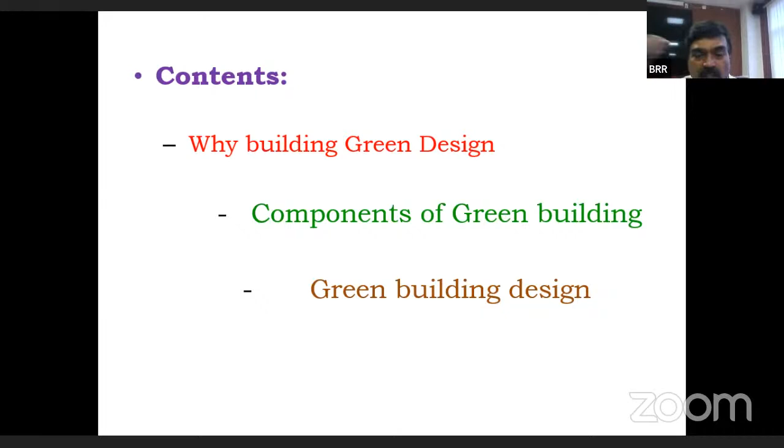So why do we need a green building? Because day by day we are urbanizing, and more than 50% of the buildings, offices, or houses that exist today are yet to be built. Whatever stock we are going to see in 2030, the present stock would be around 40% only. The next 60% is going to be added by 2030.

By 2050, the built-up area of India may be around 4 times the current mass. This is a study made by the Ministry of Urban Development that indicates the demand of buildings as well as the general requirements required for design of the building. This makes us give an agenda or a template for how we should proceed further.

Construction is an essential part of development. We need construction for every infrastructure, buildings, factories, or whatever. Construction increases the economy, increases employability, and is required for economic growth. At the same time, construction is also responsible for consumption of huge energy, and when you consume energy, you emit emissions, including carbon emissions. So construction is, on one side, a growth engine, and on the other side, a very big pollutant.

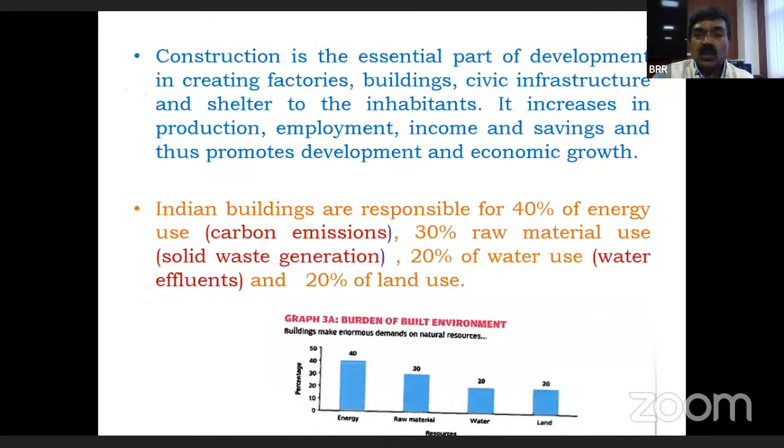The building stock is going to be 4 times or more by 2050.

More urbanization causes the urban heat island effect. This is seen in urban areas where pavements, roofs, everything is either concrete or asphalt or some other material. There is a lot of heat produced, a lot of emissivity between different materials buildings are constructed with, and lack of evapotranspiration because there is no vegetation. Moisture gets evaporated and lost from the atmosphere, increasing the heat, and the whole area becomes like a heat island. This is the concept that huge urbanization leads to urban heat islands in urban areas.

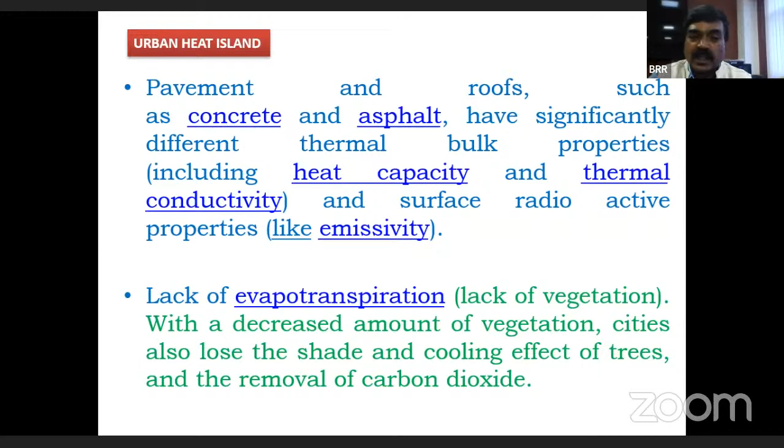Tall buildings provide multiple surfaces for reflection and absorption of sunlight, increasing the efficiency with which urban areas are heated - this is called the urban canyon effect. Buildings block wind, which inhibits cooling by convection and prevents pollutants from dissipating. Waste heat from automobiles, air conditioning, industry, and other sources also adds to the urban heat island.

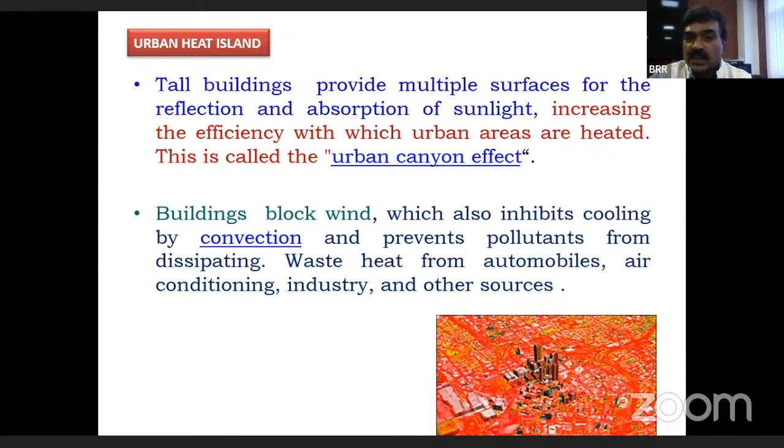High levels of pollution increase UHI as many forms of pollution, majorly due to radioactive properties in the atmosphere, causing a rise in temperature and increase in concentration of ozone. These are a few effects of urban heat island. But we can think of some mitigations - white roofs, green roofs, planting trees, or green parking lots. As civil engineers, we will be concerned with white roofs and green roofs.

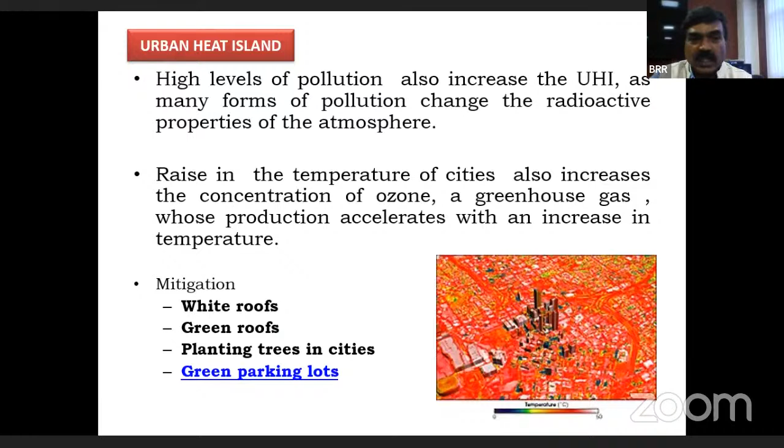When we talk about construction and building activity and building materials, this building construction activity, every stage of activity has got some environmental effect, right from the mining of the material.

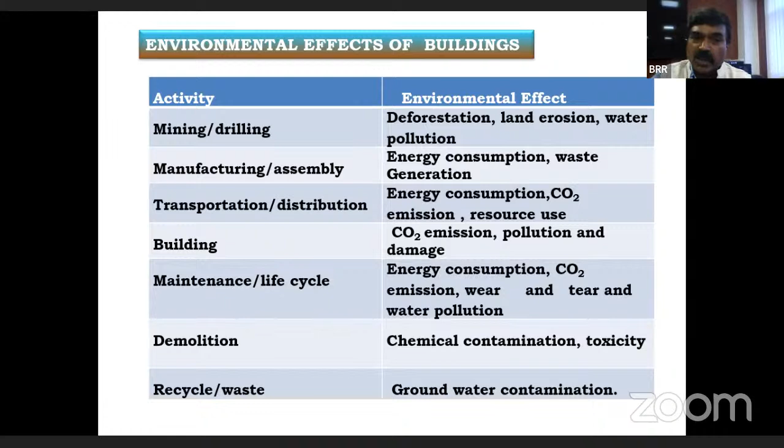Then we think, what is a green building? This green building is the practice of increasing efficiency by which buildings use resources, energy, water, and materials while reducing the building impacts on human health. We use minimum resources and reduce the impacts on human health.

They ensure that the waste is minimized at every stage during construction operation and entire life cycle cost of the building also. Throughout the life cycle, they will ensure that the waste is minimized.

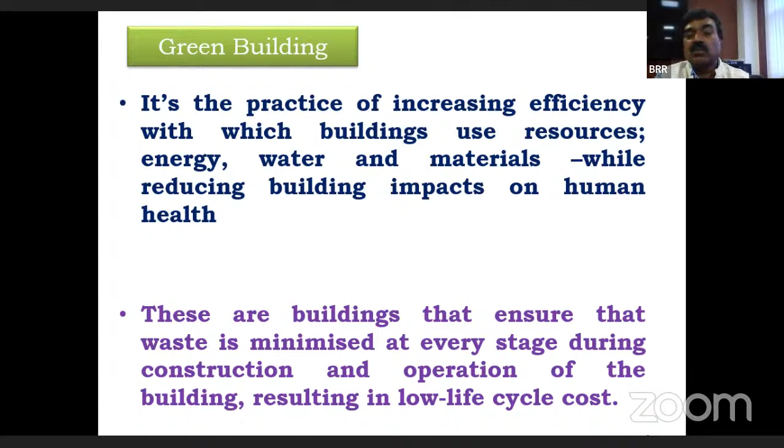These are the small components which are of course not required. The small elements where, how do we add some things for making a building green? Something like shades, sun shades, green shades. You are adding new renewable energy sources.

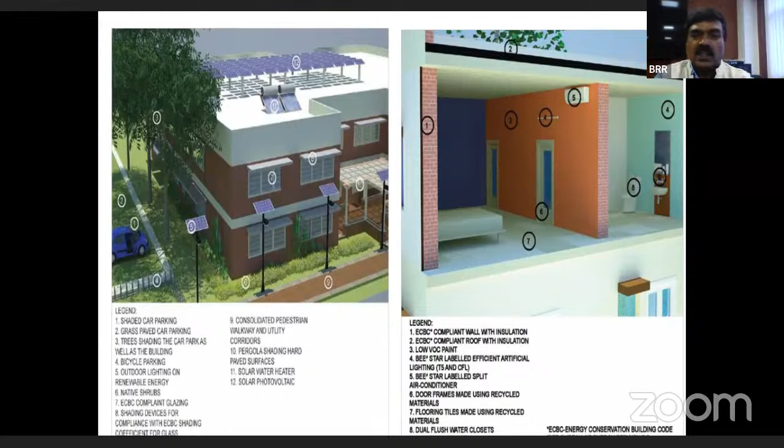This is lighting, of course. This is reuse of water, using the reused water as a third pipeline. We generally use the gray water also for flushing the tanks. So we are reusing the water.

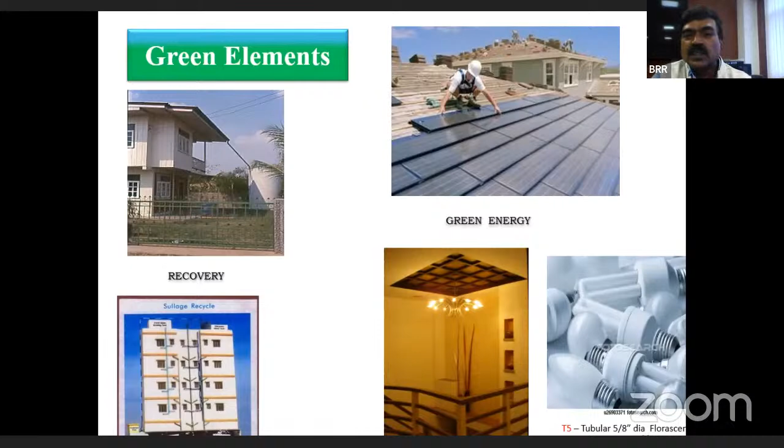Some shading elements.

The green building, okay. There are two different rating systems for greening in India. Generally, we go with that. The one is Griha, the other is LEED. LEED is generally now taken up by IGBC. We call it IGBC rating and also Griha rating. They take so many parameters into consideration while rating a building.

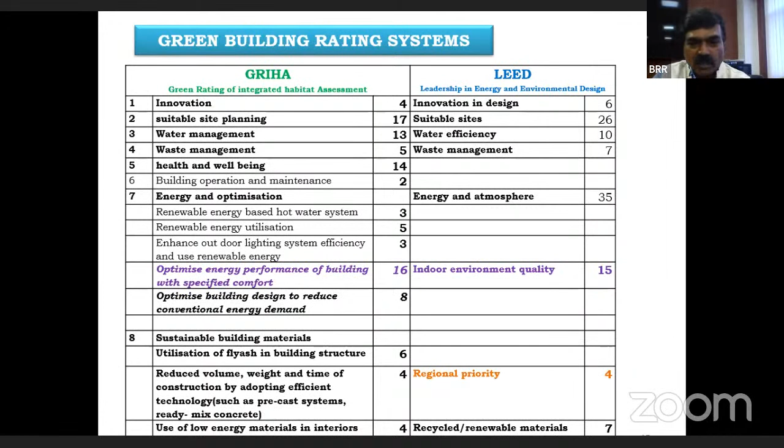They take site planning, water management, waste management, health, well-being, building operation and maintenance, then energy and atmosphere. They take sustainable building materials. They use material inputs on all the parameters that you can see.

So it needs sustainability in design and construction. What we need is to have the sustainability factor in design as well as in construction.

And it is also a legal obligation on our part to see that these buildings are built green, because Environmental Protection Rules 2006 says they need to have an environmental clearance. Buildings above 20,000 square meters or townships covering more than 50 hectares necessarily have to have an environmental clearance. So there is a legal obligation also on this part to design a building or to execute a building green.

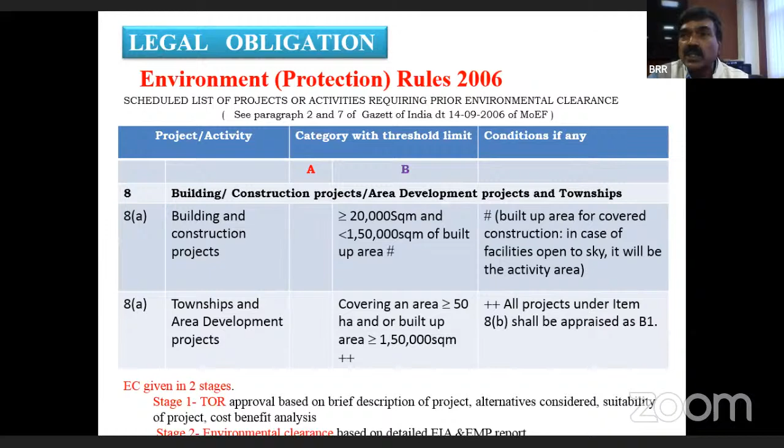Then how do we go with sustainable construction? What is sustainable construction? Sustainable construction is using natural resources in such a way that they meet the economic, social, and cultural needs, but do not deplete or degrade the resources to the point that they cannot meet the needs of the future generation. So we must consume the needs within the available limits without foregoing the requirements of future generations. This is how we define sustainable construction.

Then we have different methods of construction, generally traditional construction method, conventional construction method, and latest fast track construction method also we have. We have different materials, indigenous materials are there, locally produced materials are there, even the industrially produced materials are there.

Screen percentage, madam? I think that screen sharing is low. Sir, screen percentage of screen sharing. Okay, okay.

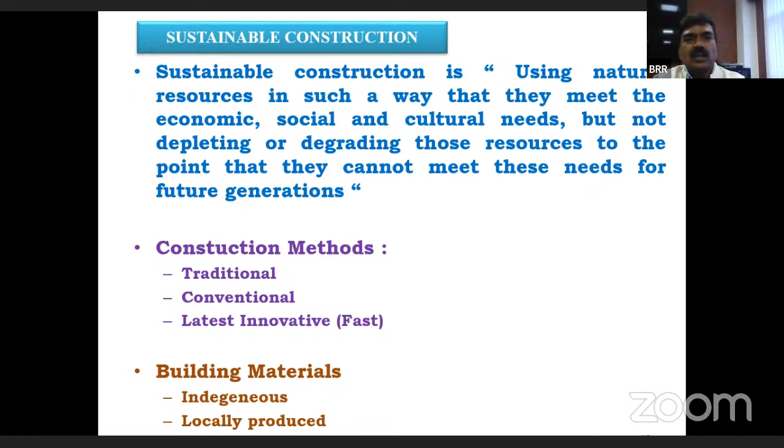So the UN also had got into that, and International Standards Organization has established some set of indicators for assessing the sustainability and performance of new or existing buildings. And they are with relation to the design, construction, operation, maintenance, refurbishment, and at the end of the life.

All parameters, at every stage of construction, there is a need for sustainability, and ISO 21929-1 has indicated, has come up with some 38 core indicators by which we can assess the performance of the building. Some of the factors are safety, functional performance, material use, power and water consumption for construction, then pollution during construction, operation and disposal, including waste disposal, carbon footprint, thermal comfort, indoor air quality, maintainability, life cycle cost, impact on the economy, and like that.

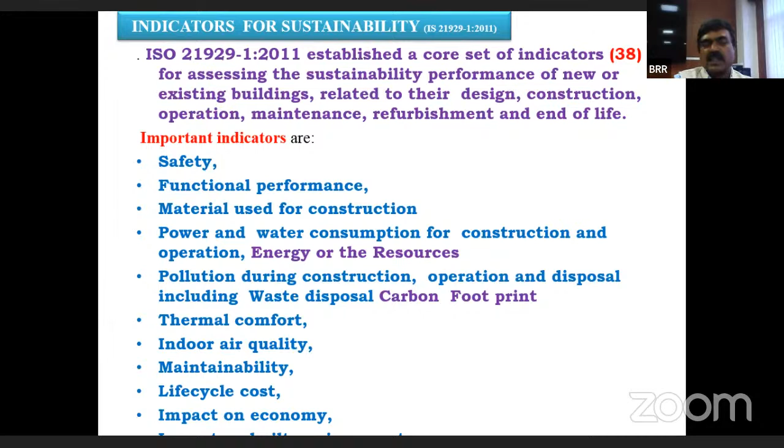Sustainability is dealt very thoroughly in Part 11 of NBC. I think everybody is conversant with this sustainability factor. Generally it includes sustainable design, sustainable use of material and alternate material, and optimizing building envelopes. This may be a little new for you.

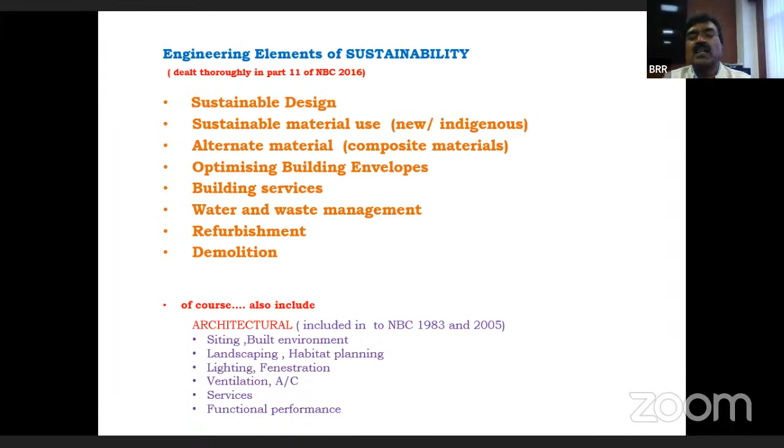They also include building services, optimizing building services, sustainable building services, water and waste management, refurbishment and demolition. They also include sustainability factors not dealt with in Part 11 of NBC but included in the old NBC, like architectural parts such as siting, built environment, landscaping, habitat planning, lighting, fenestration, ventilation, services, and functional performance. These are other factors mostly dealt with by architects in designing a sustainable building.

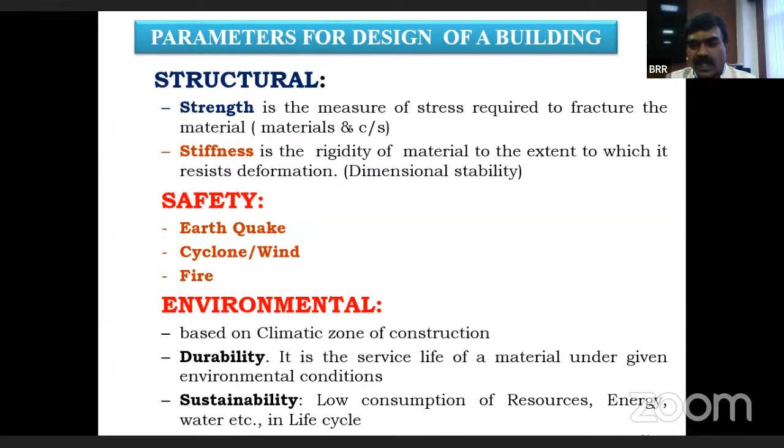Sustainability means assessing the consumption of resources in designing a building - what inputs you are taking into your design, such as cement, steel, or concrete. Majority of our structural design deals with only cement, sand or fine aggregate, and steel - these are the only two materials we generally talk about. We should talk about all material inputs and the energy required to bind and build them, and the water required as well.

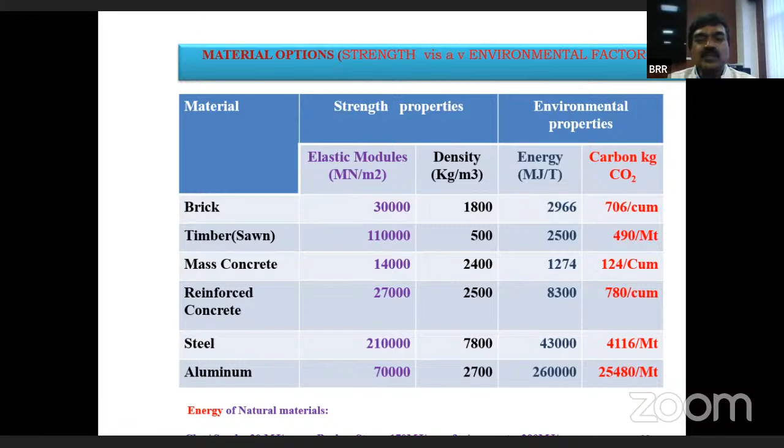Material options are also available. We will see how energy consumption varies from material to material, since all are civil engineering materials. We categorize all materials based on their energy consumption or embodied energy: high energy materials, very high energy materials, medium energy materials, and low energy materials. Generally, sand, aggregate, and fly ash are all low energy materials.

Medium energy materials are simply manufactured locally, like clay bricks, tiles, concrete bricks, and timber - these are all locally manufactured or prepared materials. High energy materials are steel, glass, lead, and cement, and very high energy materials are aluminum, plastic, copper, and stainless steel.

You can see there is a wide range of materials available for construction - it's not limited only to cement, it's not limited only to steel. We use every part of the material. Now we must know the embodied energy of each material to choose for our required strength.

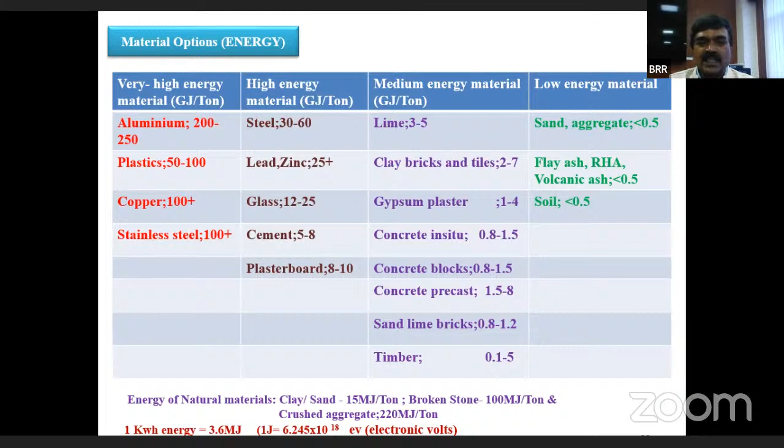Even some materials, you can see the energy getting very high. Why? Because majority of construction materials are being industrialized. There were days when all materials required for building construction were made available in a village. Now no material is available in the village for construction. Everything has to come from the town or city. Even majority of cities don't have the material, and they have been industrialized.

Industrialization of construction material has led to consumption of huge energy, especially for transportation and for quality. For instance, transportation takes a lot of energy consumption. If you want a steel plant, you can't find one in every town or district. You need to go at least 500 to 1,000 kilometers to get steel, from a steel producing factory.

Similarly, industrialization of construction material has increased energy consumption. So this is the idea we want to convey: locally produced materials have low embodied energy and they consume low energy.

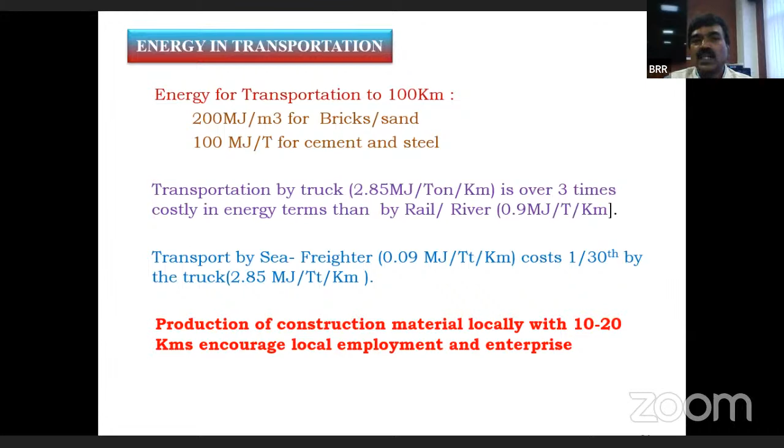Next, the other factor I want to share with you is thermal comfort. This factor we engineers generally don't take into consideration, but nowadays everybody is talking about thermal comfort. We have been getting thermal comfort.

In earlier days there used to be bigger wall thicknesses, bigger sections, to have capacity in what we call the building envelope - wall and roof. So earlier, the section of the walling element or roofing element used to have higher thicknesses to have greater capacity to transfer heat.

Now you can't venture to have bigger thicknesses of walls and high thickness of material components. So for that, everybody is going for RCC. The frame is always RCC. All the partitions we do are either glass partitions, gypsum boards, or even 9 inch brick walls, 6 inch brick walls, and so on. So thermal comfort has become a big issue.

The architectural inputs into thermal comfort used to include window size - there's a ratio in the code for window opening to floor area ratio - then cross ventilation, and the number of air exchanges in a given room, meaning the volume of air that comes in and goes out in a day. Number of air exchanges, direction of windows - these parameters were taken care of earlier, but now because of space constraints, that can't be done.

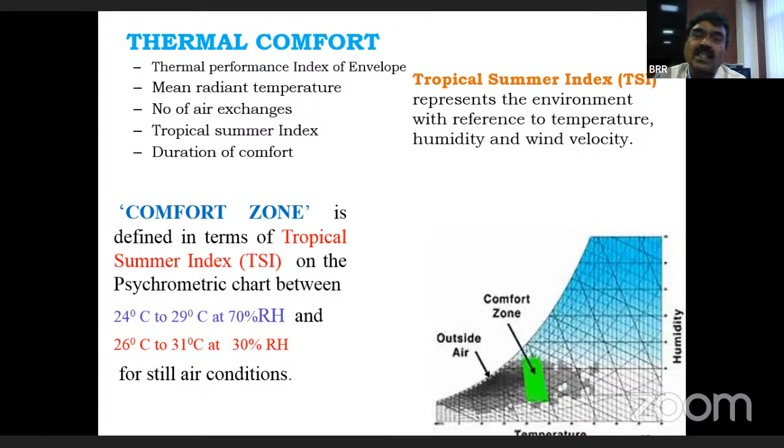Further, the building design should aim to achieve this comfort zone. The idea is to give students exposure to the fact that there is a need for a comfort zone in designing a building. Next.

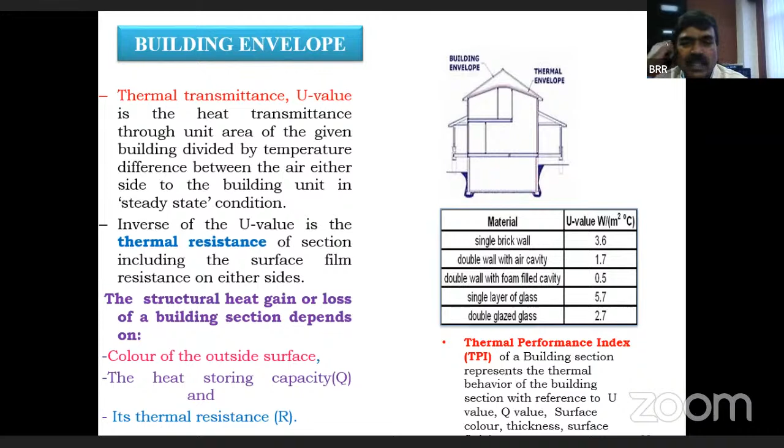Employment potential: for industrially produced options, around 11% of the population depends on construction activity, and their livelihood is based on building construction. So when we design a building, one parameter we can add is employment generation. Employment generation should be one of the parameters to select a building component, a building material, or a building envelope.

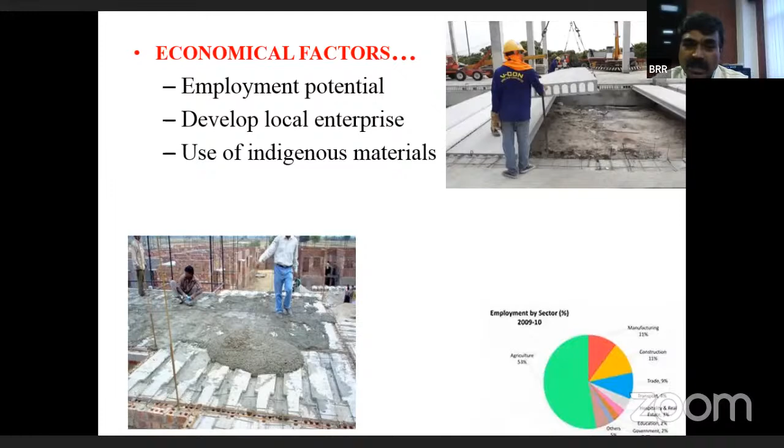Then to design buildings, these are the parameters: strength, safety, durability, embodied energy - every material has some embodied energy. When designing a building, make a list of how much energy each building component is going to consume - metal, cement, sand, water, fly ash, brick, and so on. Then there's the embodied carbon or carbon footprint.

Then the envelope performance. If you are going to design a building, you should not design only a frame and forget the rest. We always find that structural engineers limit themselves to designing columns, beams and slabs. No - the number of elements in a building will be far more than these 2-3 elements. There is fenestration, walling, ceiling, flooring, and services. All of those together make an envelope, and we have to check the performance of the envelope.

We can do that by thermal performance index. This can be calculated for every envelope, and then you can assess the indoor environment. Tropical summer index also you can do. Then you look at employment generation, the life cycle cost - which material, which parameter, by replacing which material, what technology can reduce the cost - all these things you can add.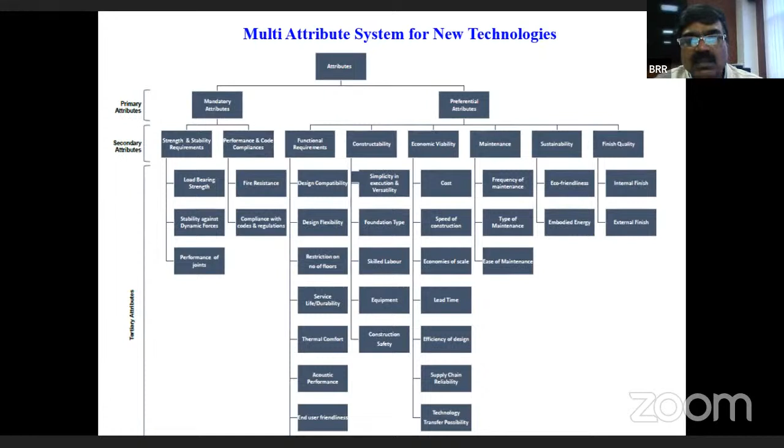Of course, when we talk about design, finally we have to arrive at the final cost and compare it with the available materials in the market - which one will cost less, and which one can get done faster. So time is another factor. The finishes, sustainability, maintenance, and life cycle cost are things which have to be necessarily looked into while making a design. We cannot limit ourselves only to the parameters of strength and stability; we need to look into all these attributes, which have to be added to your design parameters.

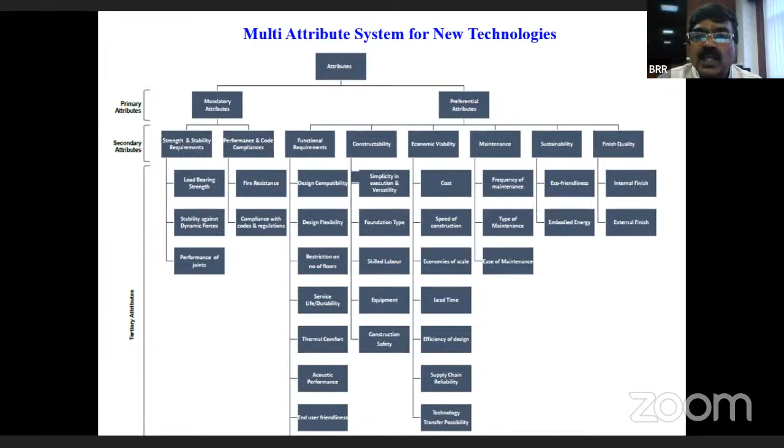This is how we try to put some of the parameters, check them for different types of buildings, and try to arrive at a building index, an environmental building index. This is how we can say a particular building has an environmental index value of 1, another has 1.2, or -6, -4.

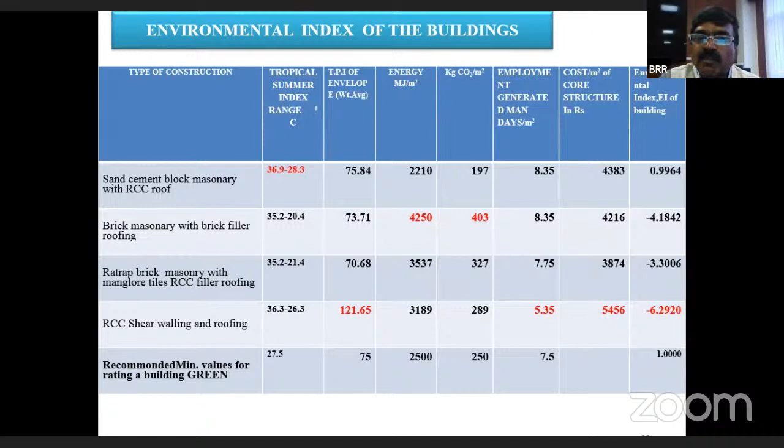And there is employment generation being done there. When you go towards the technological side, dealing with plastic, aluminum and metals, you will be depending more on industrially produced materials, which have a lot of carbon footprint. Comparatively, you can see around 16 to 17 times the carbon footprint compared to a local material.

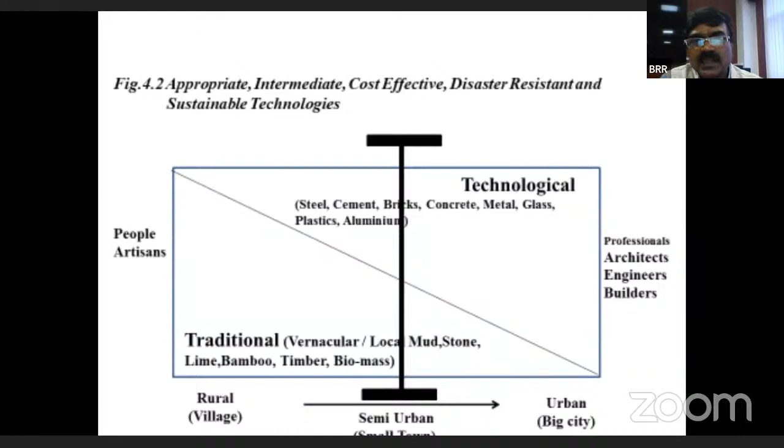So this is what I wanted to add. Some parameters which I tried to add to the regular design for sustainable design of buildings, I can capsule now. Apart from strength and safety, one thing is energy, the embodied energy of the material. Then we talked about the carbon footprint that each component of material leaves. The third part is the thermal performance index of a building section.

So when we talk of a building, we divide it into the building envelope, containing facades, walls, roof, flooring and so on. Each element is to be checked for its thermal performance, and then the overall indoor environment, arriving at the comfort zone. So we talked about the comfort zone - how do you arrive at it, how do you manipulate the materials required for the walling, roofing, and building sections?

Then we also discussed the need for low consumption of material like water. Water is very precious, and we consume a lot of it - 20% of the water used is for curing. So materials which consume low water, either for manufacture or for curing, need to be selected, because as we spread our construction activity, our requirement is going to increase by 2050, there is huge pressure on water, huge pressure on clay, huge pressure on sand.